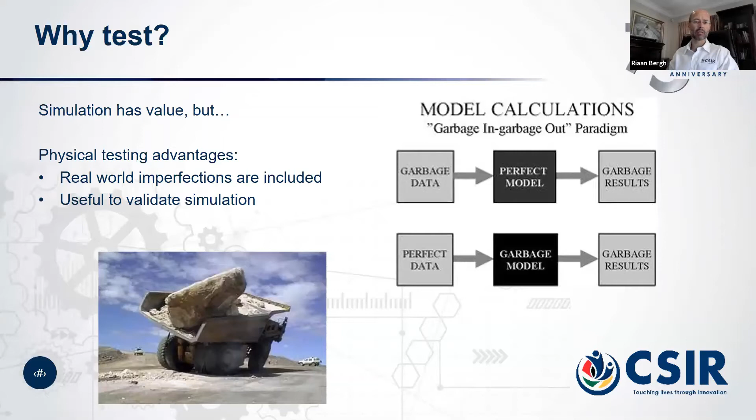A few more reasons why testing is useful. The first is to confirm material properties. Now, in many cases, your product may come with a material data sheet, but I would like to describe an experience that we had early on in my career at the CSIR, where a combination of unidentified or unanticipated failure mode and eventually what turned out to be material properties that were not as required resulted in quite a bit of work, extra work over a weekend and a missed Springbok rugby match.

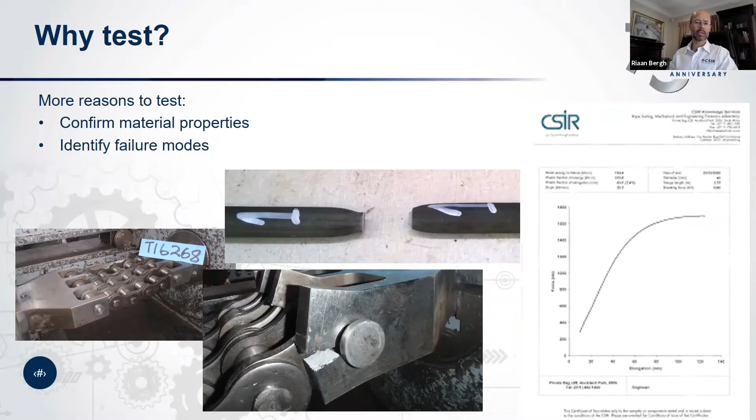And had we been doing tests on items of this nature and having seen destructive tests where a similar clevis type was tested to destruction, we would have anticipated that failure mode as well. And secondly, if we had insisted on a materials test certificate of the material that the test fixture was made of, we would have known ahead of time that this fixture was not at the required tensile grade. Unfortunately, we found that out after the fact in doing a bit of cause analysis, but it all could have been prevented had we insisted on a material test certificate for this material post heat treatment.

But when we tested the rope to destruction, we found that it had only about 38% of its rated strength remaining. And the condition on the interior of the rope was actually quite a bit more severe. Many of the wires were corroded down to needle points, and on the inside of the rope, when we took it apart to inspect it after the test, we found that there were handfuls of corrosion material, rust essentially, that made up the inside of the rope, and not much good steel.

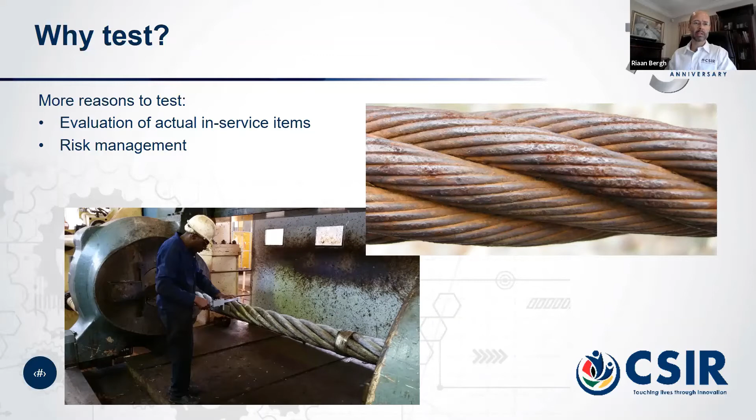A few comments about standard test methods. So what is a standard test method? It's when a document provides detailed directions of how to do the test and how to produce the test result. A standard test method provides a basis for laboratory accreditation programs, and it also allows inter-laboratory comparison of test results.

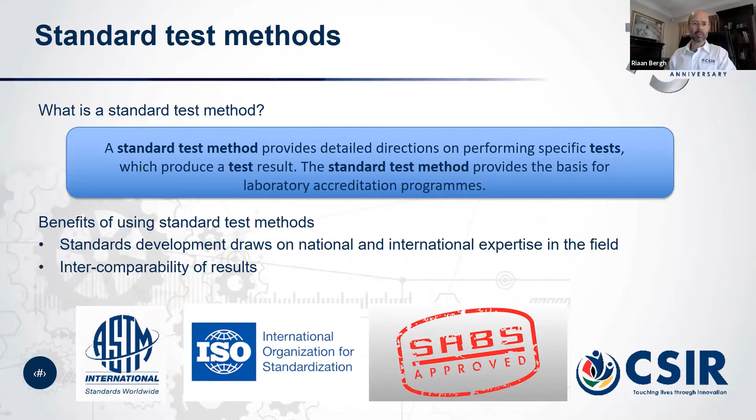The institutions that you can see the logos of at the bottom are examples of institutions that publish standard test methods. One of the benefits that we derive from applying a standard test method is that we don't come up with a test method just based on our own experience and our own wisdom. But we have the opportunity to draw on the expertise and the competence of national and international experts in the field. So we can stand on the shoulders of giants, as they say. But standard test methods are not always available, and we'll get back to that in a few minutes.

So not the most interesting slide to show you, but as I said, one needs to at least touch on test accreditation. This can be a webinar in itself to get a better understanding of the accreditation of test methods. But let me just touch on a few main points. So first of all, as one might know, in South Africa, the institution for accreditation of test methods and also a number of other conformity assessment functions is SANAS, the South African National Accreditation System. And so when we speak about accreditation, it's often called SANAS accreditation, so we know why.

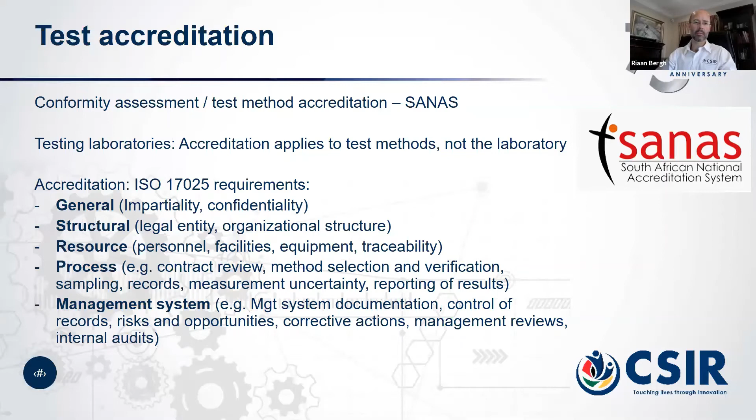And that might mean simply going to the laboratory, paying them a visit and asking them, how will you do the test? Show me what the test setup is going to look like, what equipment is going to be used. Is this load cell calibrated? Can you produce a copy of the calibration certificate? Is it traceable to an international standard? Do you know what the uncertainty of the measurement is and how will that be used in interpreting whether my product meets the performance criteria or not? These are all relevant questions that the customer is quite entitled to ask of the laboratory, especially in the case where the method is not accredited.

So a few thoughts about agreed test protocols. Agreed test protocols is what comes into play in the absence of a standard test method. So when a standard test method is not available, between the customer and the laboratory there needs to be agreement on the objective of the test. It may seem like a trivial point, but in the absence of a good understanding on both sides of the objective of the test, it can easily happen that a test is done that does not meet the objective, that misses the mark. An important thing to also understand is what is the requirement or requirements of the end user.

And maybe a comment about this in the particular case of the mining industry. In many of the tests that are submitted to the CSIR test laboratories, the customer that brings the test to the CSIR is the manufacturer of the product who wishes to sell it to mining companies. The end user is going to be the mine. And in a case like that, it is also important for the test laboratory to understand both the requirement of the manufacturer of the product and of the mine, or at least for both of these to be taken into consideration when deciding on the test protocol.

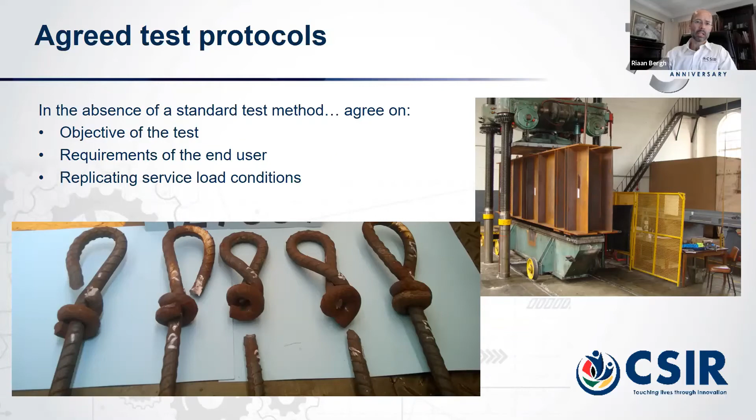A few comments about recreating service loads. So a good starting point is to have a sound understanding of the actual service load conditions. And then, in discussion between the laboratory and the customer, to select an appropriate test protocol. That includes how the item will be constrained in the test machine, how the load will be applied, perhaps including how many samples will be tested, if not only one, and also what the performance criteria or the acceptance criteria will be. It's not always possible to replicate exactly the actual load condition, but it is important to discuss and agree on valid approximations where approximations need to be made.

I'm reminded of the expression from my undergrad days that in engineering, an engineer will approximate a horse as a sphere just to make the math easier. Now that is perhaps an extreme example, but approximations are often necessary, but they need to be valid and they need to be understood and agreed.

And then consistent, competent test execution. And this goes back to my earlier comments regarding accredited laboratories and the importance of the customer confirming for themselves the competence of the test laboratory. It can also be based on recommendation or confirmation of others, but the best is always to get confirmation for oneself.

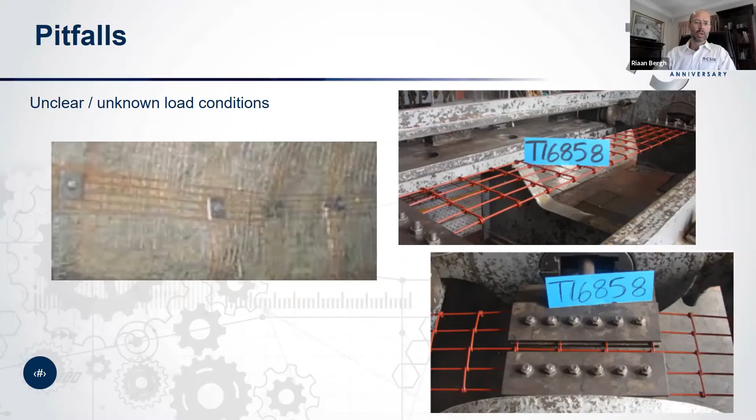So the same is true for the mesh in this example. This is not the way that a mesh is installed in the mine. It's typically constrained at 4 corners only. And so a different type of test configuration was designed and is now implemented regularly, where the constraint closely resembles the actual application in the mine.

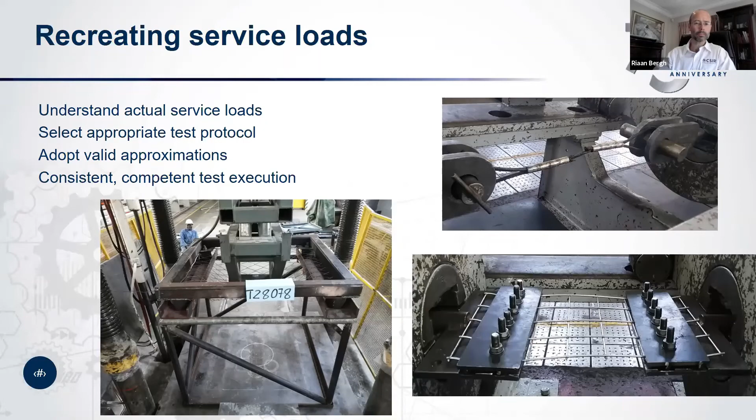So we went through a whole series of tests with this product, where we first established it can, in fact, carry the distributed load. So the product specification was in order, but the acceptance criteria for the particular application was not accurate for the use case. And that just showed us that when one starts into the procurement process, it is important to keep the actual use case in mind and to specify that in enough detail so that the product supplier can indicate whether it can meet the particular performance or acceptance criteria that would satisfy the need.

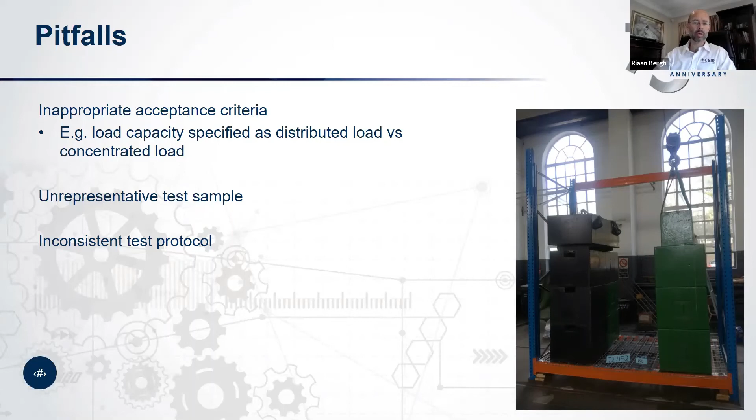because it's only when you have consistent test protocol that you will be able to compare test results of the same product over time, or to compare perhaps competing products or dissimilar products from different suppliers against the same criteria to inform, for example, a purchasing selection decision.

So just to conclude, simulation definitely has its place, but as we've seen in this presentation, so does testing. Once the decision to test has been made, it is important to select a competent test laboratory. Where possible, opt for a standard test method. But when not, it is important to discuss and agree on the test protocol to ensure that it satisfies the need.

It is important to understand the purpose of the test and aim to recreate or approximate as close as practicable the real load conditions, and one could also add the actual boundary conditions. And then between the laboratory and the end user or the customer, as it may be, agree on appropriate acceptance criteria or performance requirements to avoid the situation where the laboratory reports on the product and it may be seen to be not meeting the criteria, whereas in actual fact it could be good enough, but the criteria was perhaps not properly defined.